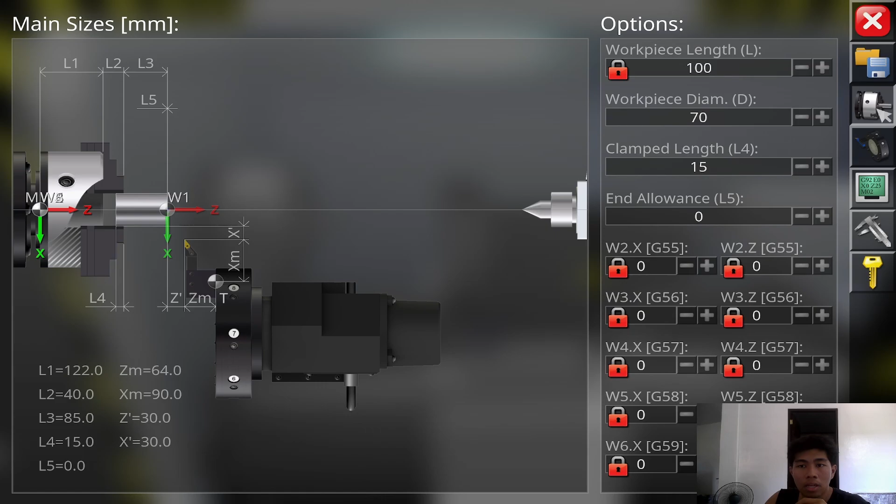Okay. And then, since it is scaled down, the workpiece diameter is set to 70 and the clamp length is set to 15. Then the tool set uses the 005 general turning and facing tool.

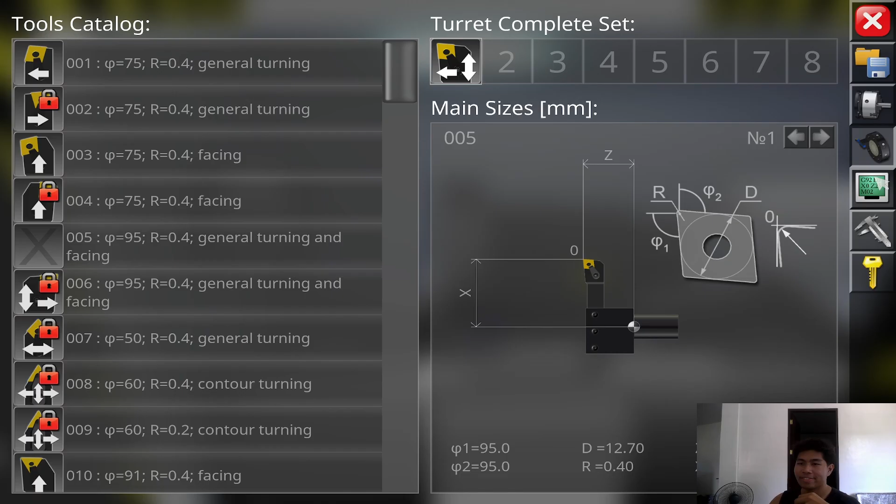Proceeding on to the program codes. O0001 is the program number. Then the start of the program is G97, which is the constant RPM mode. M03 for spindle clockwise, with a spindle speed of 1000 RPM, or S1000. Then tool number 1 and offset number 1, which is T0101.

Then the next line is G00, the rapid traverse to the coordinate point of X71 and Z1. Okay, the origin is at the face, or the front, of the stock. Therefore, positive Z-axis is beyond the stock and negative is into the stock, where it cuts the stock.

Then, after it goes to the starting point of X71 Z1, it would be at a better and much closer position for the program to start its cutting sequence. Then for big stock cutting, or removing a large amount of stock,

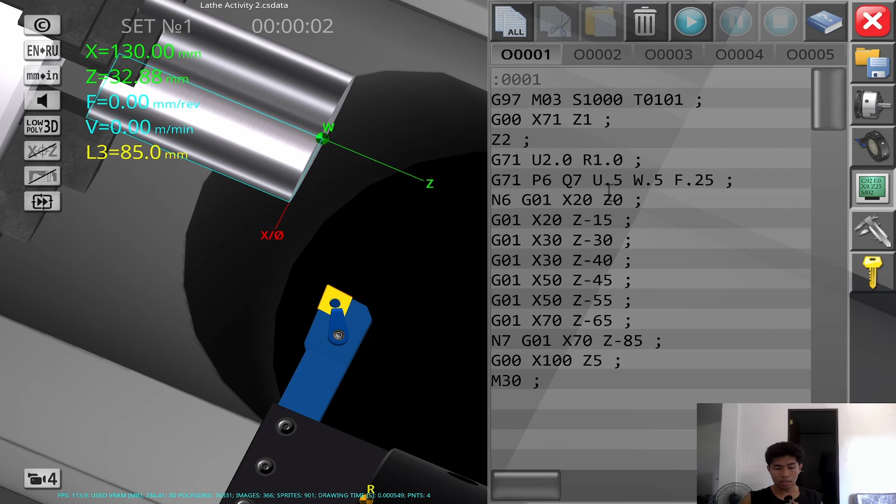Then for the finishing allowance, the letters used are U and W, with an amount of 0.5, and a feed rate of 0.25. The next line, N6, is the start of where the finishing pass is going to smooth out the stock remaining after cutting, as shown here.

The stock will first be cut at the top, or the outer part of the stock. That's where the cutting process starts, which will then go step by step, bit by bit, until it reaches the 40 divided by 2 diameter, or the innermost part of the stock that will be turned.

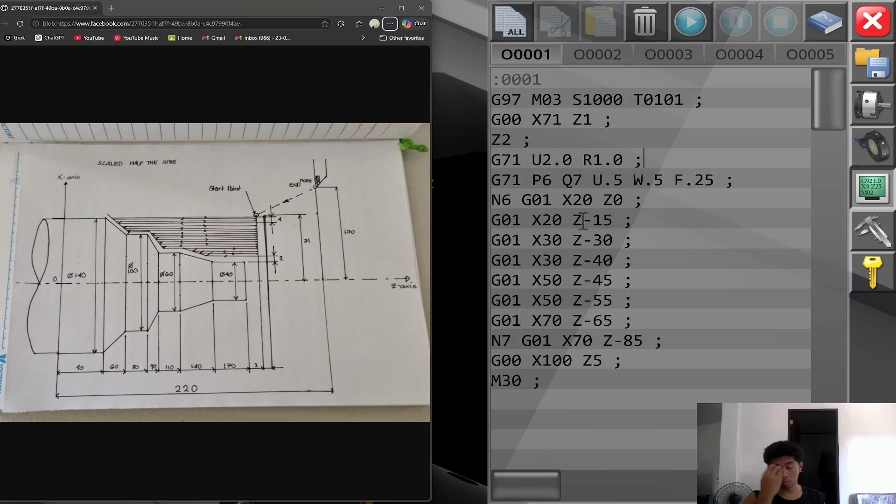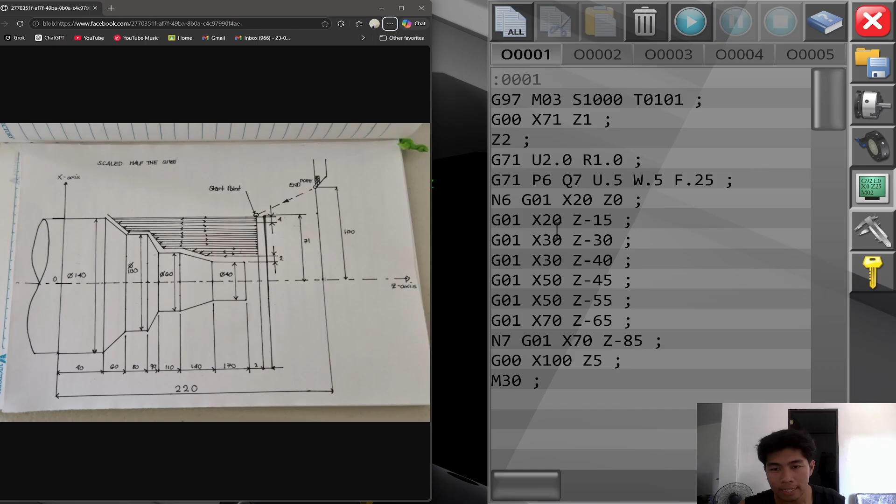Then, after it reaches line N7, finishing the sequence, it would proceed to go back to the starting point, which is also the end point. Then M30 for program end and reset. For a better understanding of how N6 and N7 work, let's watch the process.

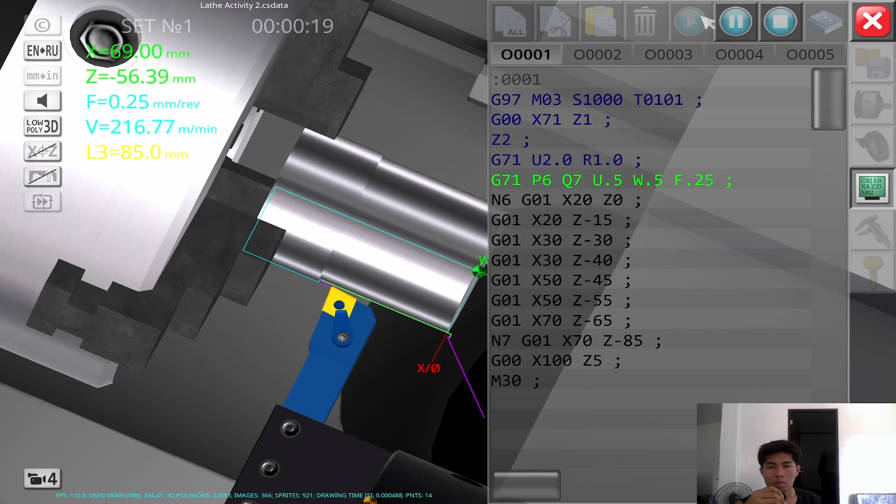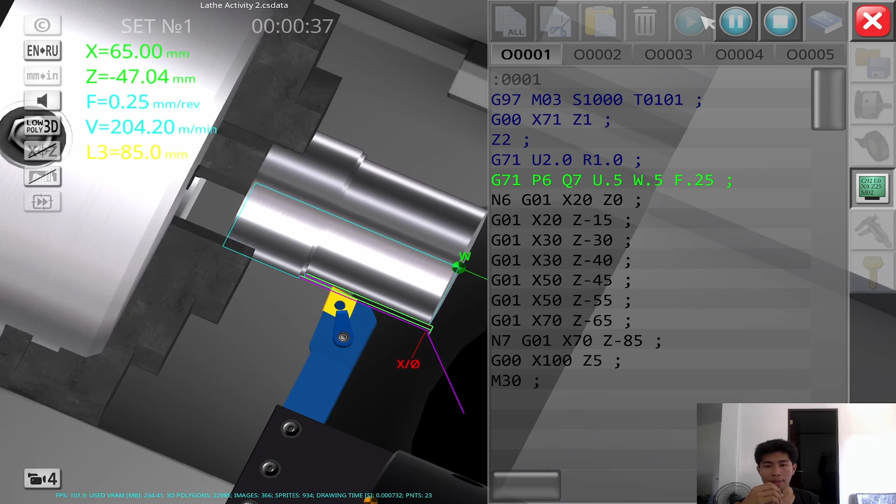The first line of G71 affects how fast the tool cuts the stock. Having a lower U value, you will have a slower cutting process, but the good side would be a more accurate and precise cutting motion, or a more accurately cut part.

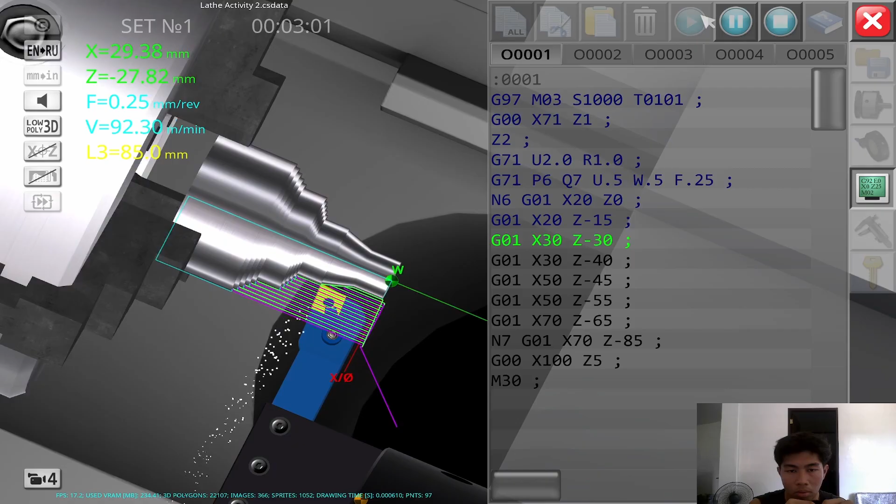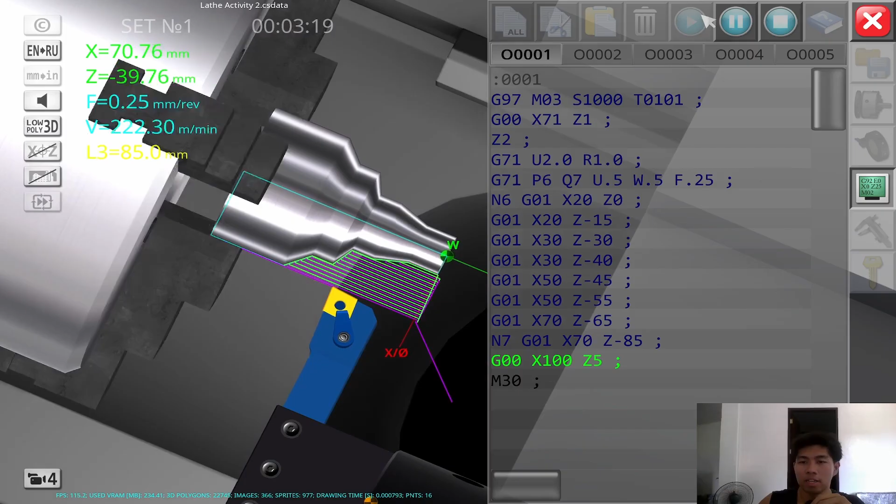Additional explanation for the G01 in N6, since it is linear interpolation. The first coordinate, where the smoothing process starts, is X20, the diameter 40 divided by 2, which is 20. Then Z0 at the origin point of Z. Then it follows the next set coordinates: X20 Z0, then X20 Z minus 15. That's why it has a flat shape in this part.

Then G01 linear interpolation to X30, which is here, and Z minus 30, going further back. Then X30 retaining its X-axis, moving further back to Z minus 40. Then the next line is X50, which is this diameter, 100 divided by 2, 50. Then Z minus 45, moving further back to create this slant.

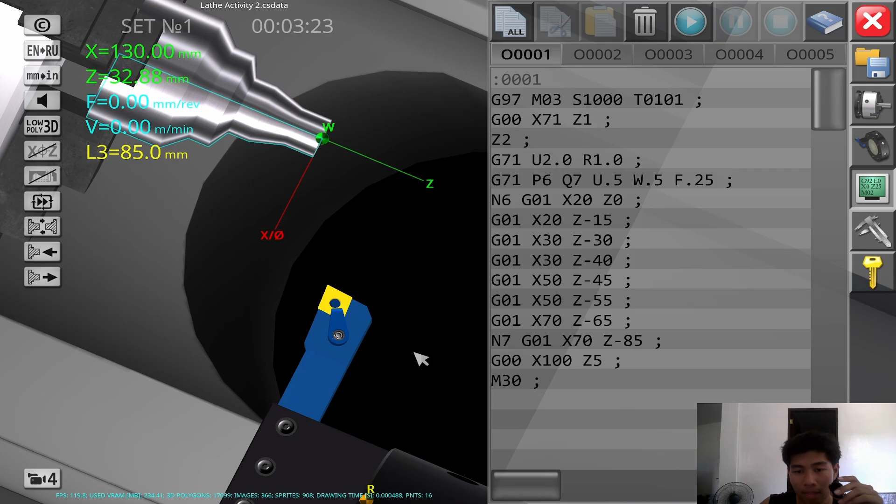Then after finishing the end part of the sequence, the tool goes back to the starting position, also the end position, with G00 X100 Z5, then M30 for program end and reset.